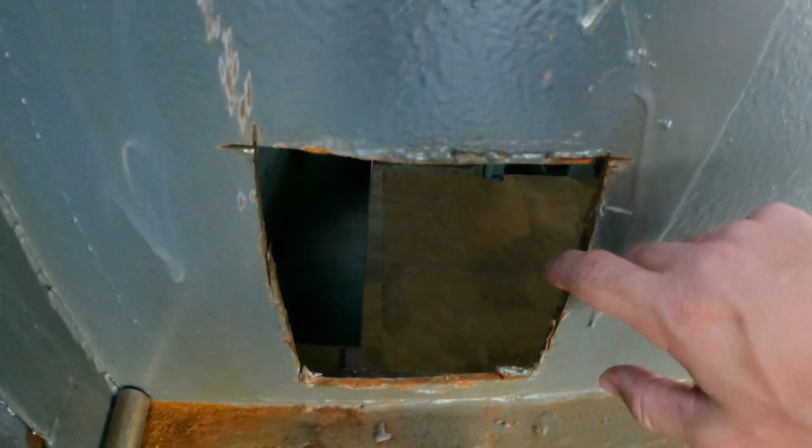Step one of filling up this square here is to grind out the previous welds and neaten up this hole, ready for a new piece.

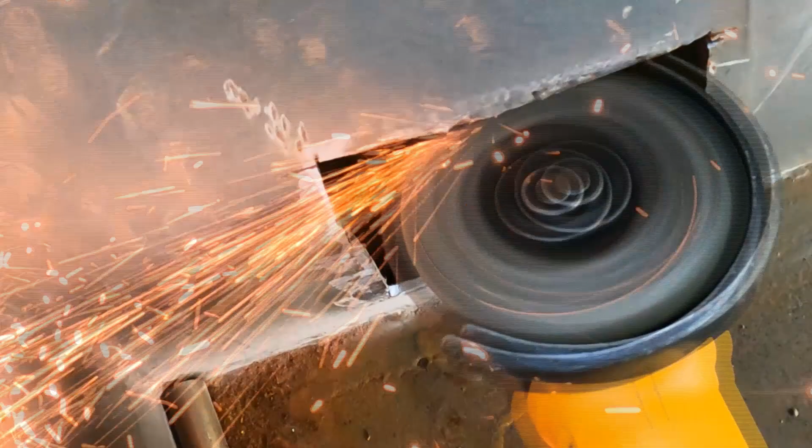So this is all ready to make the new piece up. I've taken off the paint around the edges so I can weld it better, and we've got a nice straight line now all sides. So we'll get the piece measured up and cut to fit in there.

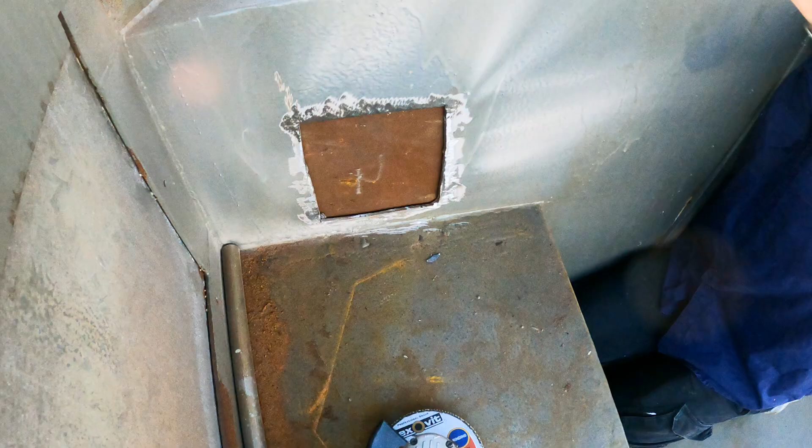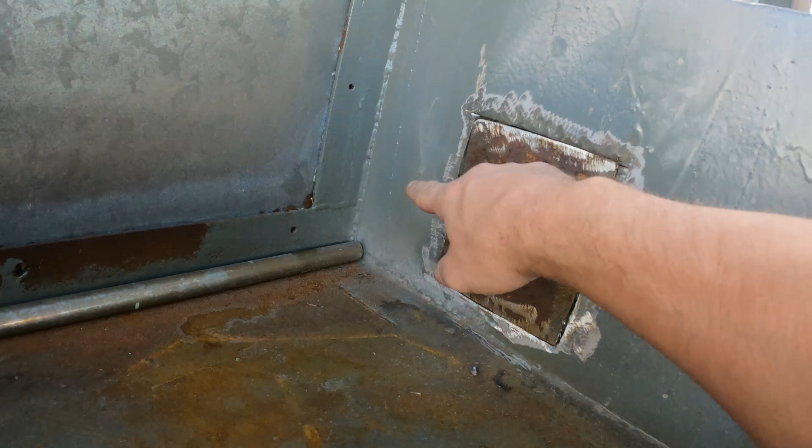So we're just going to start welding today. I've put my replacement piece in, and it's being held in there by a couple of magnets. I'm going to tack weld this in, then tack weld in the other side, and then we'll get into the full weld.

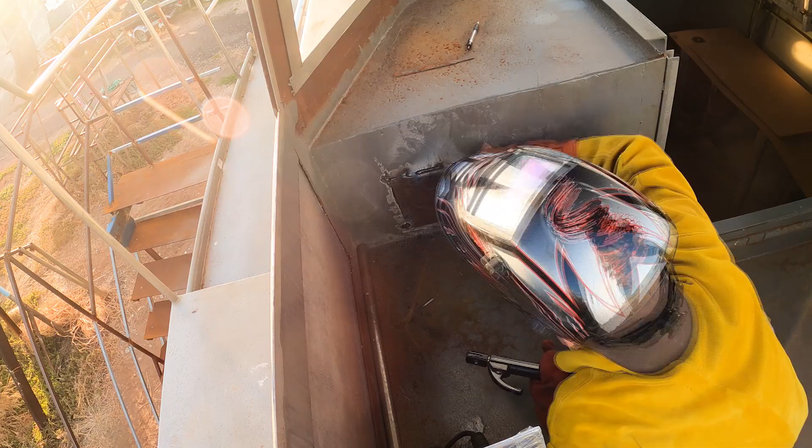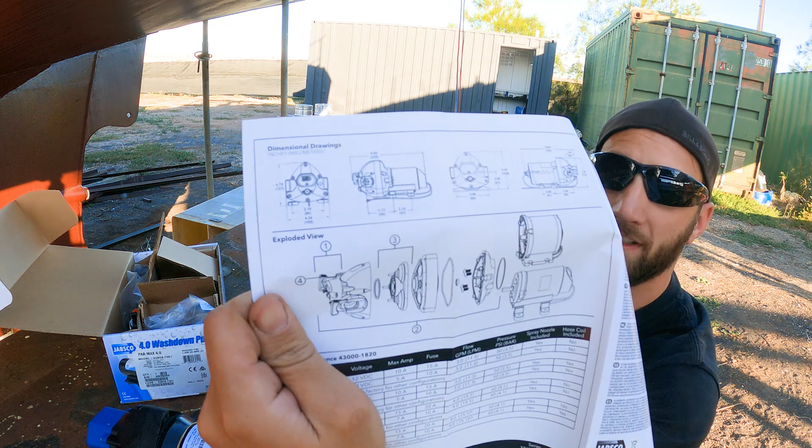Unboxed my high pressure water pump, and I was hoping to see a template that I can unfold and use to cut out and drill my holes. However, it doesn't have a template. They are nice enough to provide some detailed drawings, and the center line in between here and here is 80mm, which is nice, and it's just an 80mm square. I did think I could use my 3mm plate, but thought it would be too flimsy for my bracket, so I found this 6mm plate and I'll cut a piece out of it.

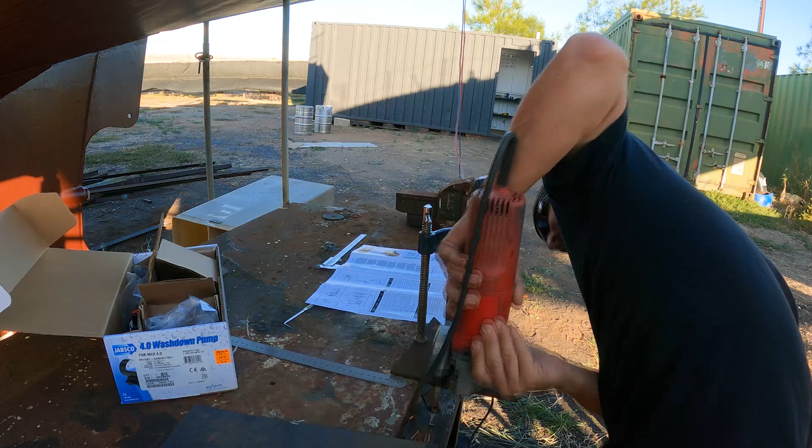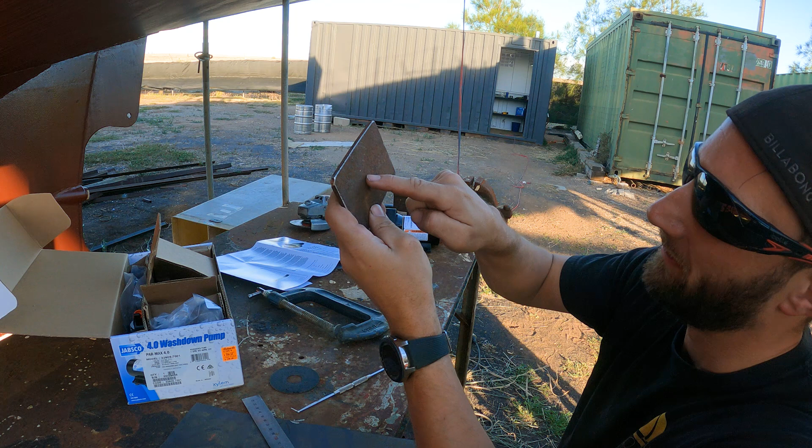So I've cut out my little plate. I'm going to draw a center line, come out 40mm each side of the center line, draw another center line, come out 40mm either side of the center line, and this should be able to bolt on nicely here, putting the bolts on through here.

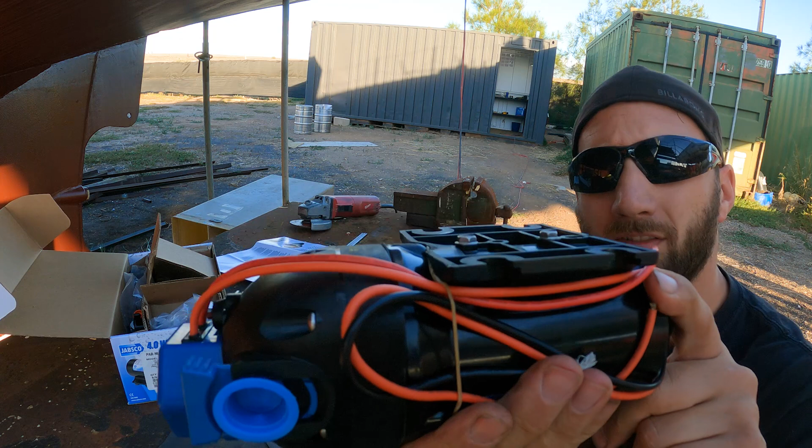We'll have to drill out holes for these two because those two holes are actually not flush. I don't know if you can see that, but those are actually in the way, so this bracket can never bolt on nice and flush.

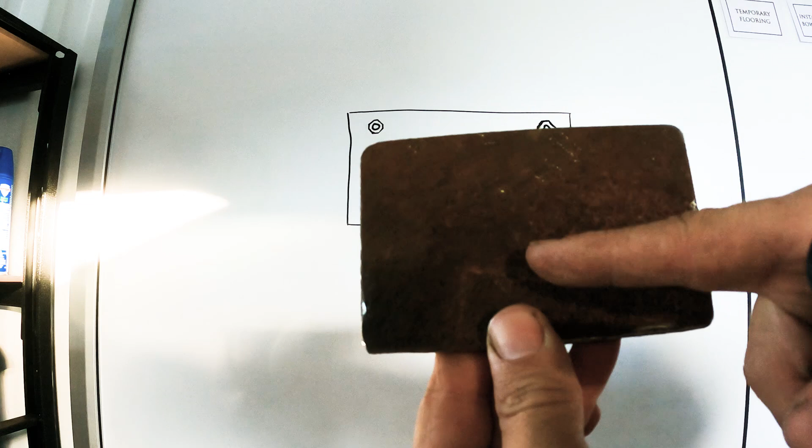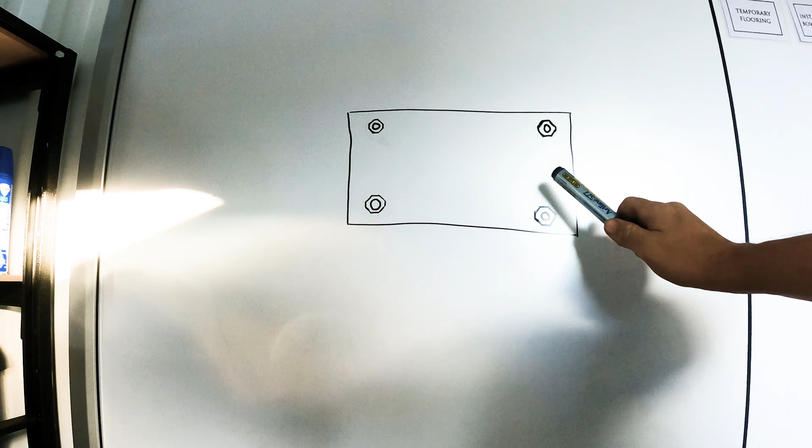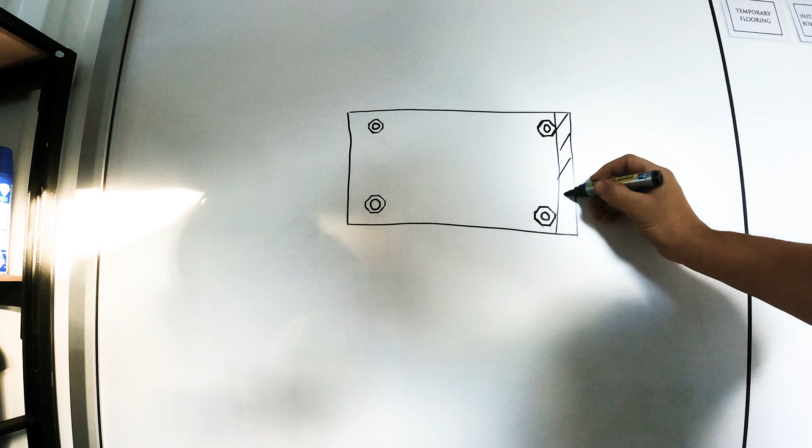Just thought I'd pop a drawing on the whiteboard here to explain what we're doing with this plate. So first step is to do a center line on each side, then mark out where our hole positions are and drill the holes. When the holes are drilled, on the back of the plate we'll have 2 nuts either side, and the plan is to weld in a plate either side, which becomes a bracket.

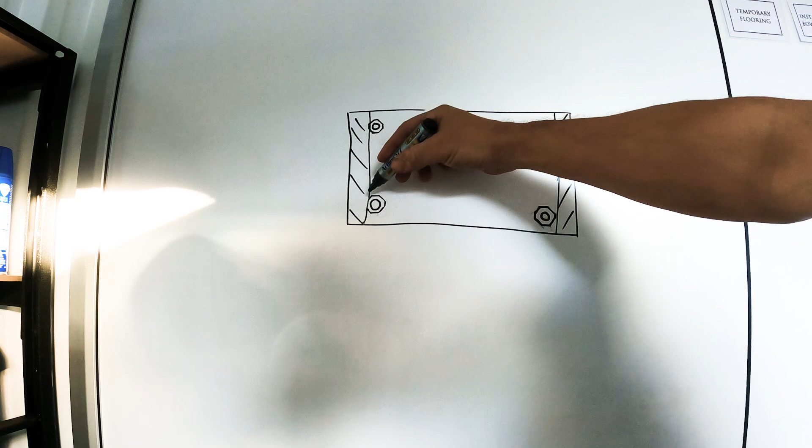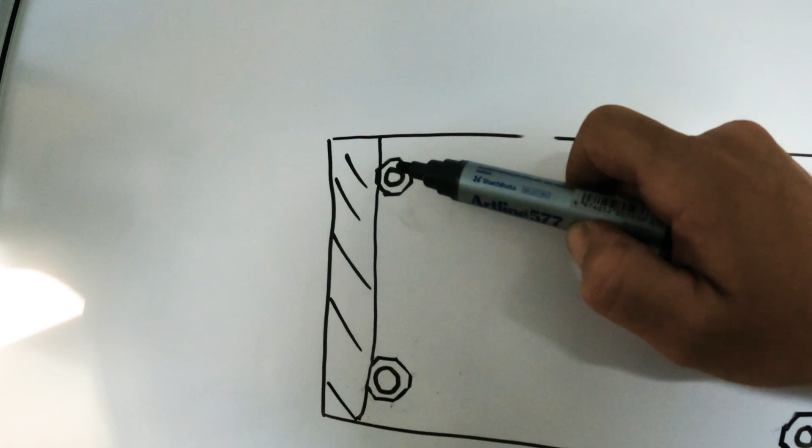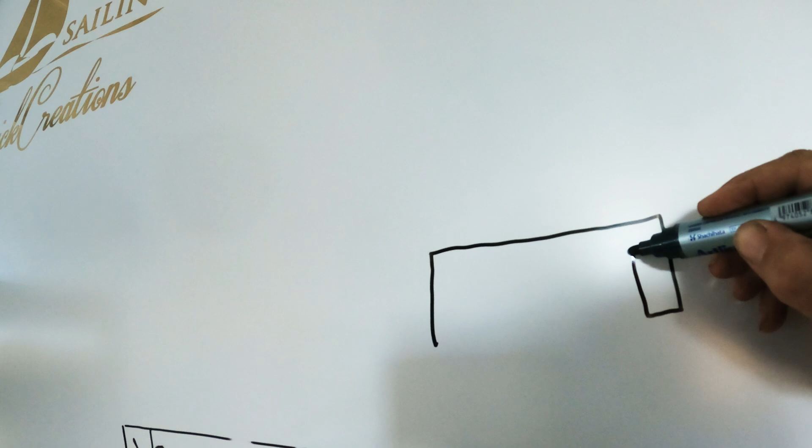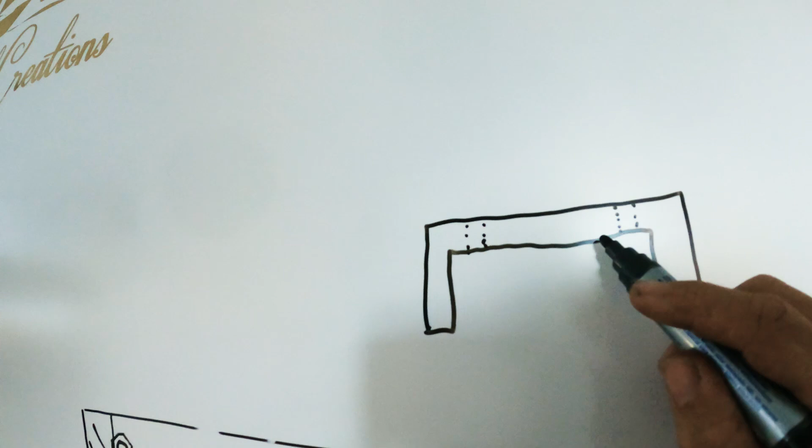All these nuts will rest against that plate so they don't turn when you do them up. So the only thing you have to do is stick the nut underneath and then screw it in from the top, and these will not spin when the plate is there. So the plate is going to look something like this, and the nuts will have a through hole here, where the nuts will end up like that, so that this wedges against the nut and the nut can't spin.

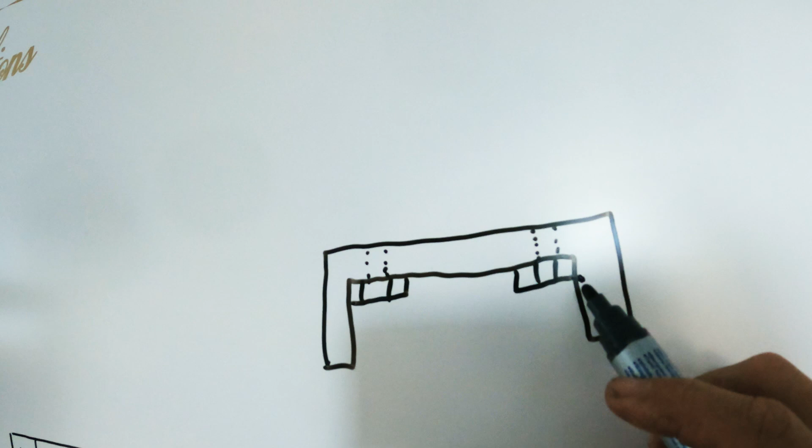So that's the plan for the bracket for the high pressure pump.

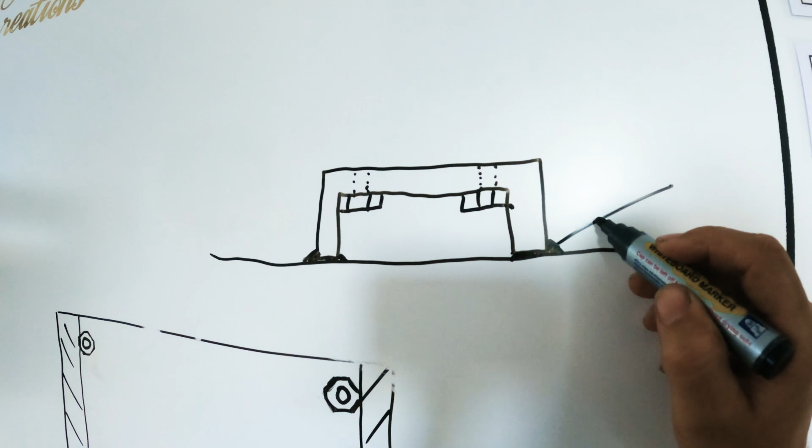Then that will have a weld either side. I won't be able to weld on the inside because my welder won't get in there, so there is a potential of having corrosion under here, but we can put a very good lot of paint on the inside. But the good thing about only having the weld here is if I need to come in with my grinder and cut out this weld on either side, I can easily do that.

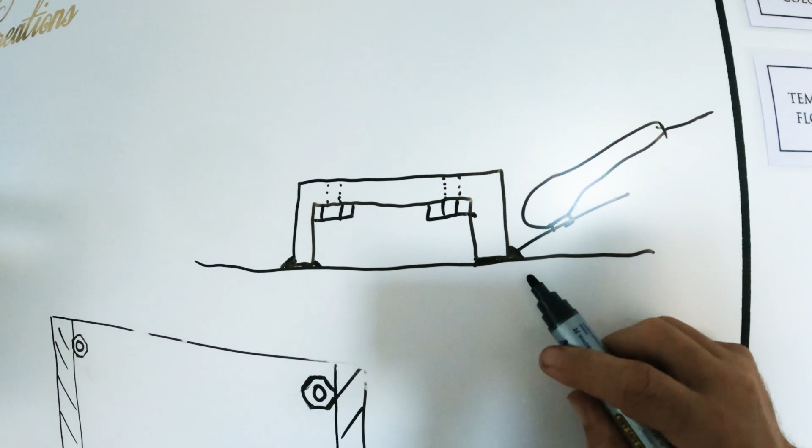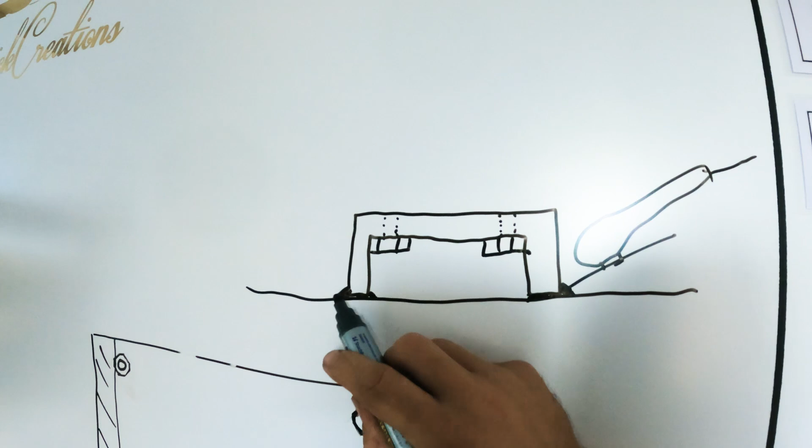It'll be very difficult to grind out the weld on the inside of the bracket. However, the bracket will last years, and if I need to replace it, it's just a matter of taking out 2 welds which are easily accessible, and off it comes and put a new one on. So that's the plan for this bracket, and we'll get cracking onto that.

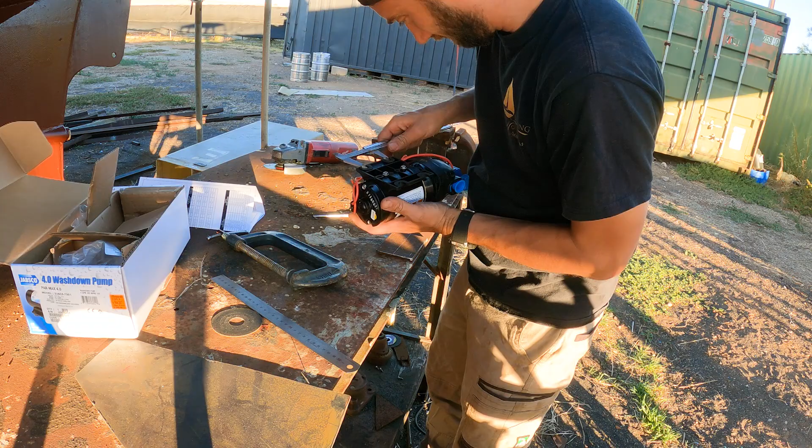Going to drill all these holes out a bit bigger than I did on the coamings. Looking like I might go 10mm drill bit. Fits in quite nicely into there. I'll go slightly smaller bolts, so probably M8 bolts, and I'm going to drill a pilot hole because I don't want to go straight through with a 10mm. So I'm going to drill a pilot hole 5mm and then go up to 10.

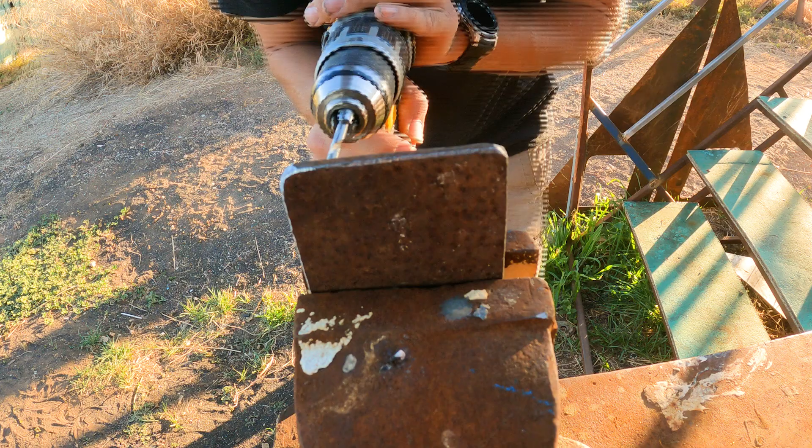My drill bit seems very blunt, so I'm going to have to sharpen it.

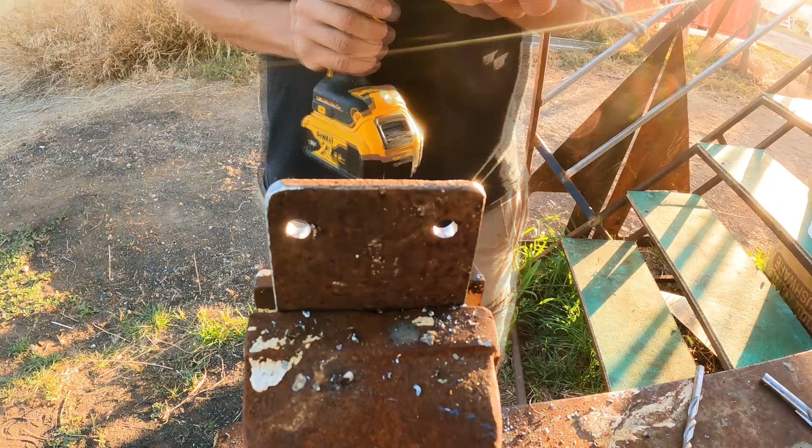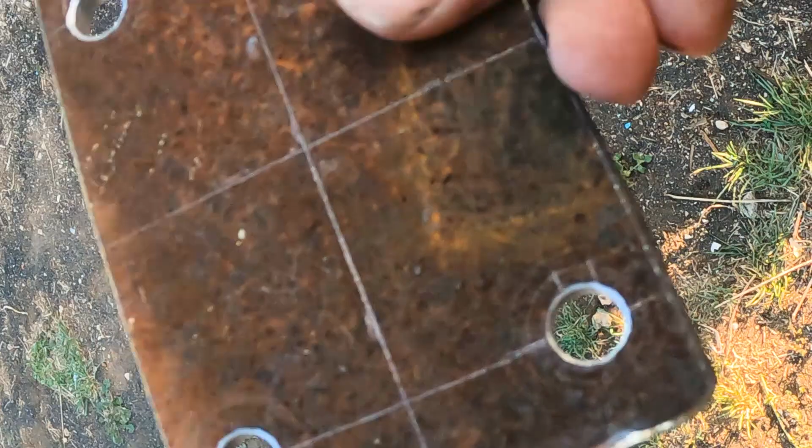So we have this plate all drilled up and the holes are chamfered and the sides are all deburred. So we just got to make those little side pieces for the nuts to go onto.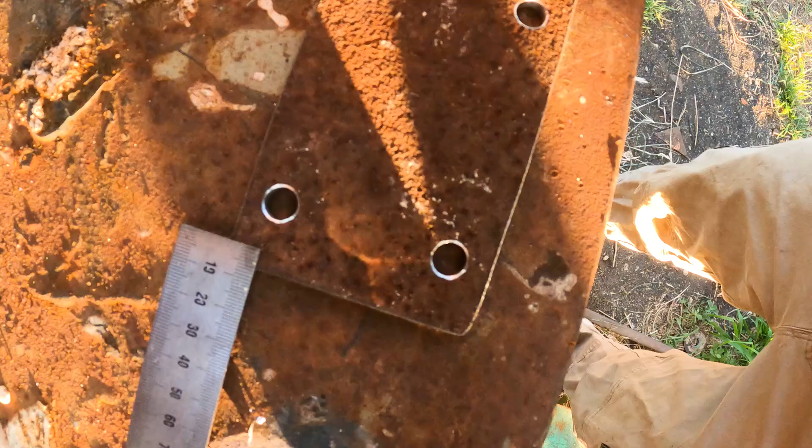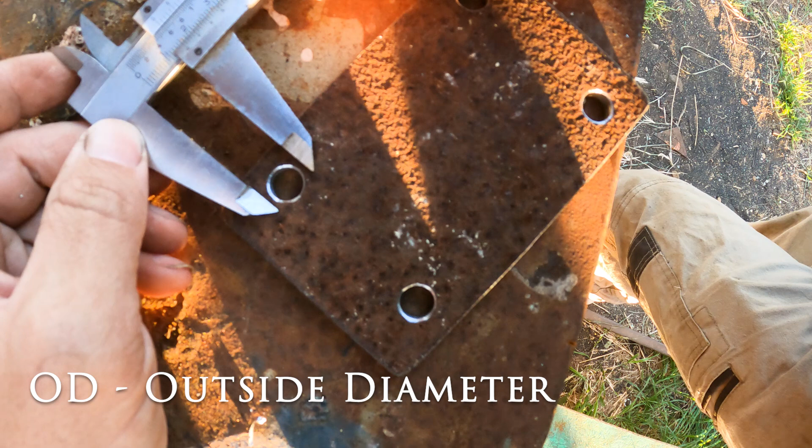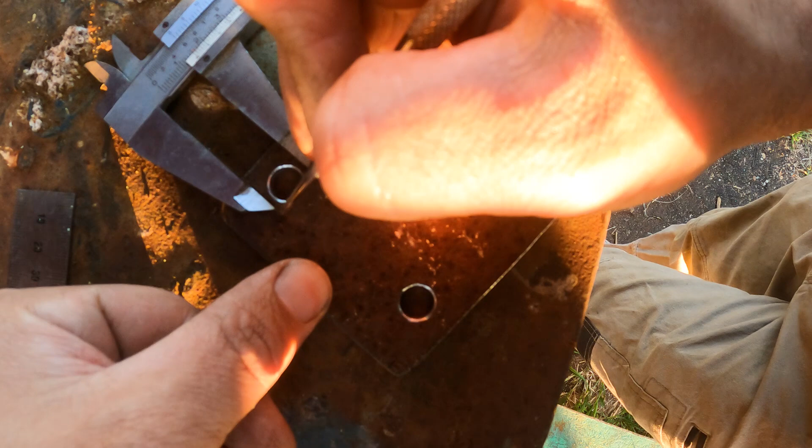So now we've just got to determine where the flat of the nut will sit. An M10 nut has an OD on the flats of 15mm, which gives me a flat area approximately here. An M8 has a flat OD of approximately 13mm, which is about the same. So I'm going to go the 15 M10, bigger bolt, bigger nut, much nicer, and that's where I'm going to weld my bracket.

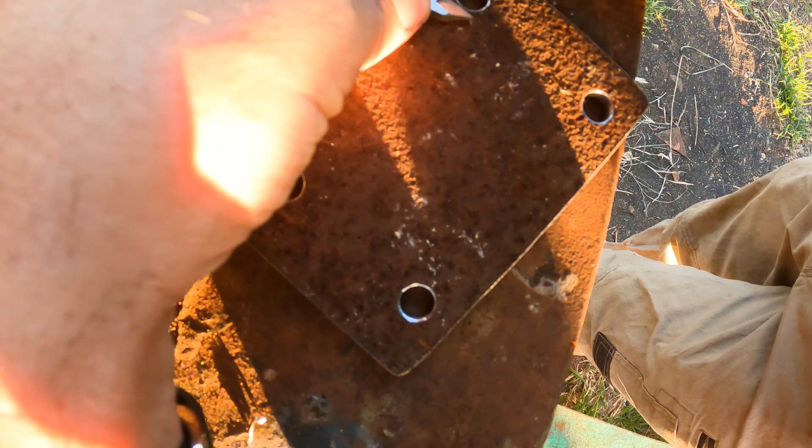The other way to check is that is a 10mm, that's a 10mm hole, and half the distance, so that the difference is 5mm, and half of that is 2.5. So we could also mark it out that way, which is the same.

My friends are coming back.

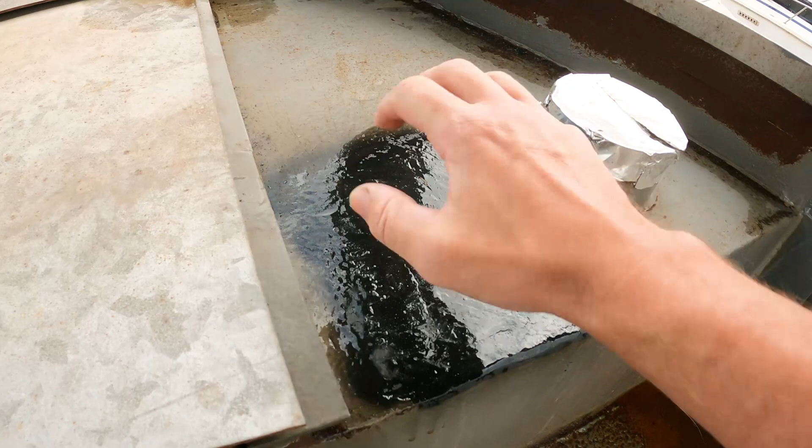So we have had a bit of a weather change, but thought we'd just show you what I've completed this week. So we welded up a patch here where the throttle controller might have been, a big rectangular patch. But I found a little bit of corrosion here, so I just quickly cut that out and welded that up.

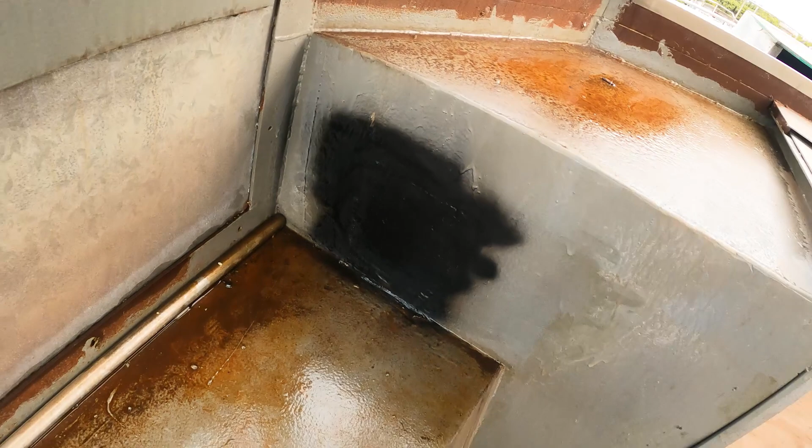And we've replaced this patch here, which had the shore connection box. Gave a little bit of paint to protect it before I get to sandblasting. So all the corrosion and holes are all patched up in the cockpit.

I'm probably going to remove this dorade because we're inside an enclosure here. It's not going to get any air vent unless I use that and put one of those solar paneled or 12-volt electric dome ones, and we can sort of use that because it sits over the top of the stove. So got to put a bit of thought into that one.

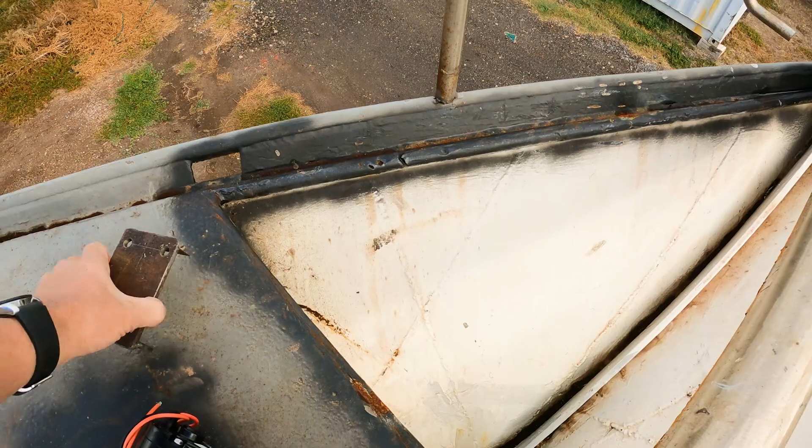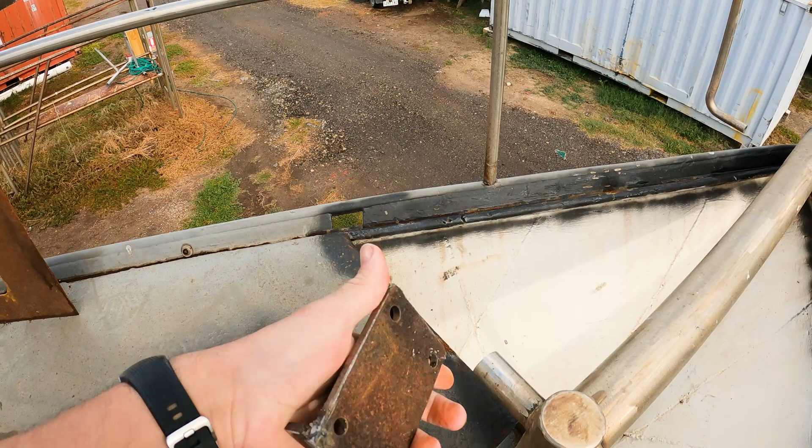So up here at the bow we finished our little bracket. I'm not going to weld this in just yet because it's quite corroded on the back side here, and if I welded that in I won't be able to blast and paint the back of that very well. So I'm going to leave it off, give it a proper blast while it's off.

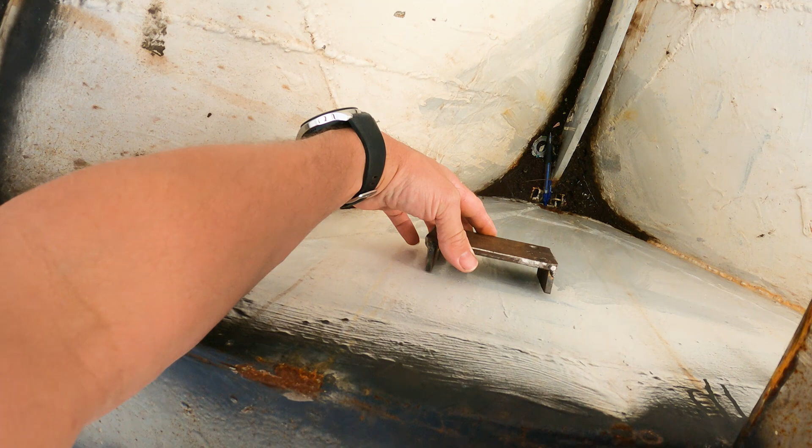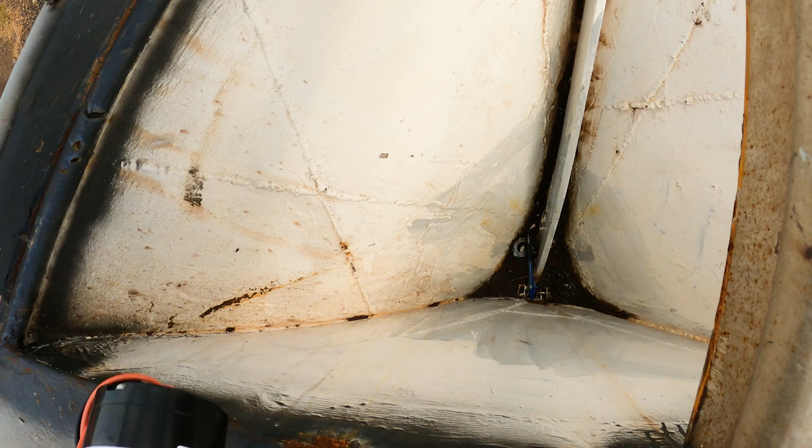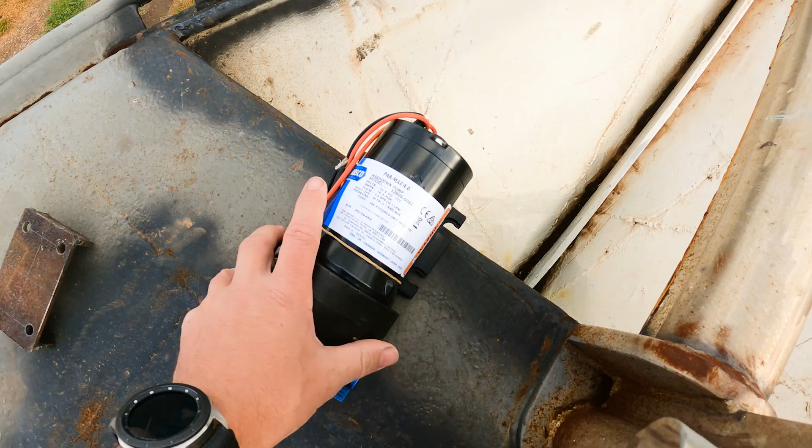So the setup I'm looking at going for is to pop this bracket down here, just weld one bead of weld either side, one there, one across here. Then this water pump will be able to sit in here. I'll have hoses coming off each side, and then the wiring is also accessible up the top here in case we need to get to that.

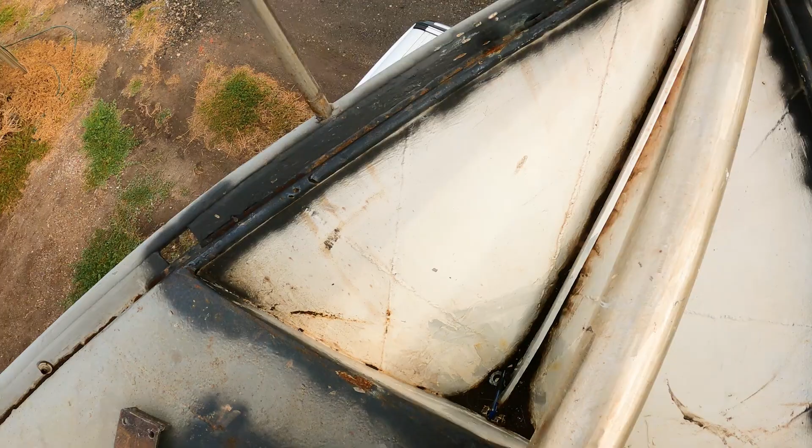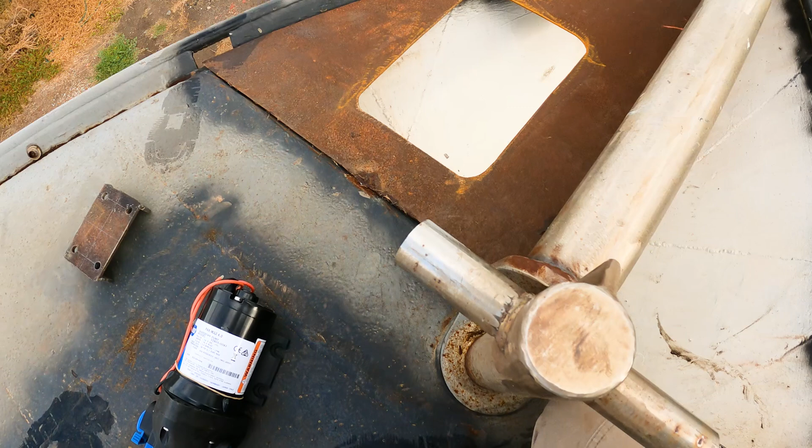So yeah, hose going this side, hose going this side, wires up the top, and then we have a hatch up top so we'll be able to access this high pressure water pump for maintenance whenever we need to, because it's just going to be sitting here.

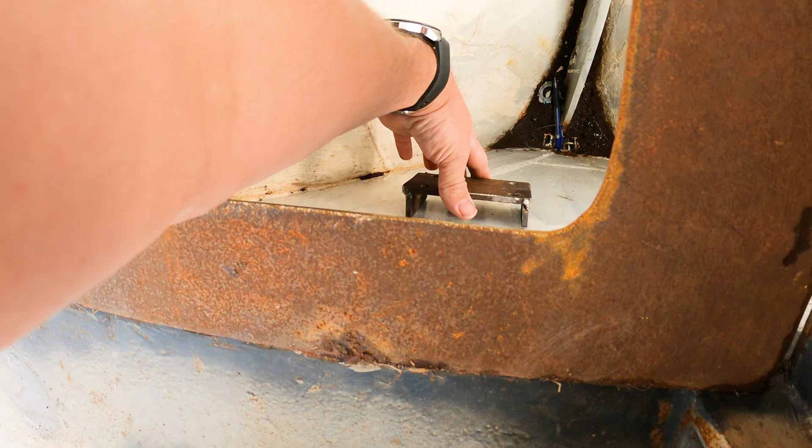And then on the other side we've got another access hole. Open that up and we can pull out a water hose to wash the anchor down as it comes up. So this bracket's going to go in here, high pressure water pump on top of that, and then we're all set to go. So that's my plan for this.

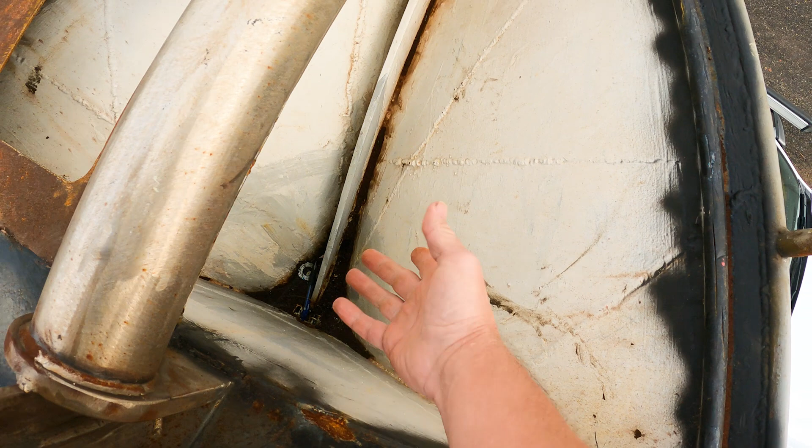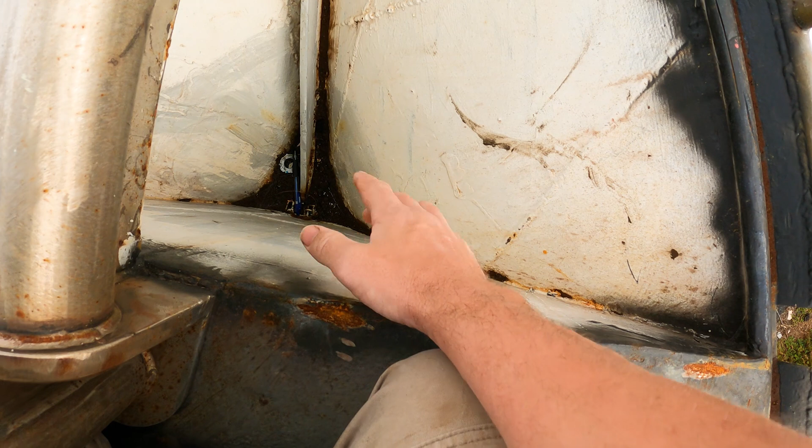So those drains down there, if we get a leaking hose, it's all just going to go out the drain, not going to fill up any compartments. We will end up having on the other side of this compartment, this bulkhead, an anchor chain locker, which will drain into this drain as well. So we're not going to have any build up of water. That's my plan for the front of the boat.

One thing to think about this week is possibly moving these bollards. They look nice in that position, and if we stand back it leaves us with a very nice big open area. You can pop a dinghy on top, you can pop the life raft there, you can even just throw some bean bags and sit around. It's a really nice convenient open spot here.

However, I have been noticing, sitting around on my boat, that the angle of this piece here is actually quite comfortable. So if I was to sit there, he's back. If I was to sit on here, it's actually quite comfortable, except for one thing that worries me - this bollard could be in a bad spot.

So thinking I might move them just past my feet, and then if you're even laying on here, you could put your feet up against the bollard and you won't slide forward. So that's an option we've got to think about. That could be an inconvenient spot when a big wave hits the boat and you're sitting here. So I might look at seeing if we could move them down a little bit. I don't think it'll encroach into that area too much - we could still use that area as a nice, open deck spot. So got to have a think about that.

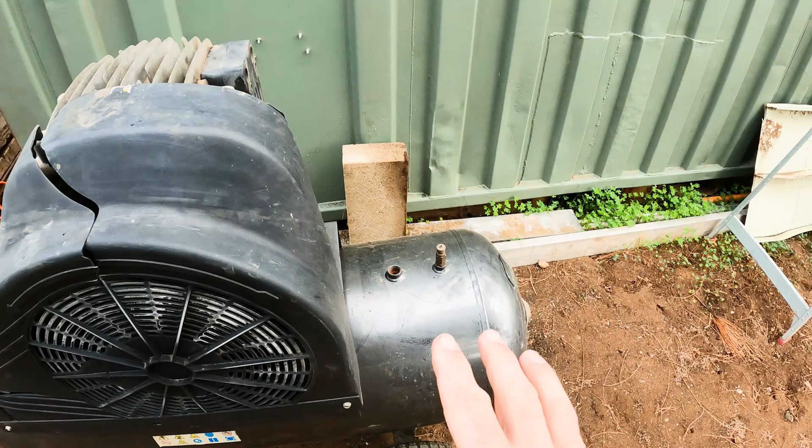So next week what I want to try and get onto is installing this air compressor. We've got it running, done an oil change, got it all up and going. I've got to install a T-piece coming out here - this is the outlet for the compressed air. We want one to go into the shipping container and then one to go over and around to the boat, so that's a big long piece of hose. But that'll get this running, and then I'll bring my sandblaster here and get that all prepped and ready to go for when we need to sandblast all the weld prep that we've done.

So all the pieces of weld that I've put on the boat so far, they all require blasting because they have no profile - they're just from the factory. They've got what's called mill scale over the top of them. You can't paint over that; it's just going to come off in about a year's time and you'll have paint peeling off everywhere. So we're going to get to setting up, getting them all blasted, see if I can get onto putting that bracket in for the high pressure water pump, and see how I go for time.